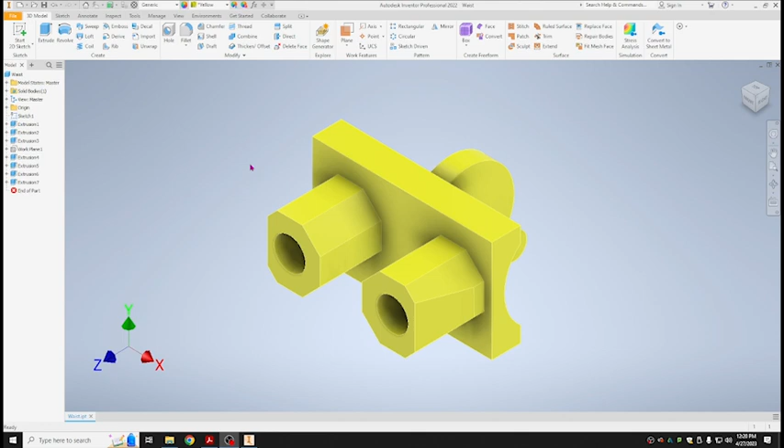All right, welcome. Today we're going to showcase how to create the waist for the Lego minifigure. Let's get right to it.

We're going to start a new file, new, standard IPT, and hit create. Now if your document settings are not set to millimeters, we can change them. Let's go to the top of the screen, hit tools, document settings, units, and change it to millimeters. Apply and close. Now we're ready to go.

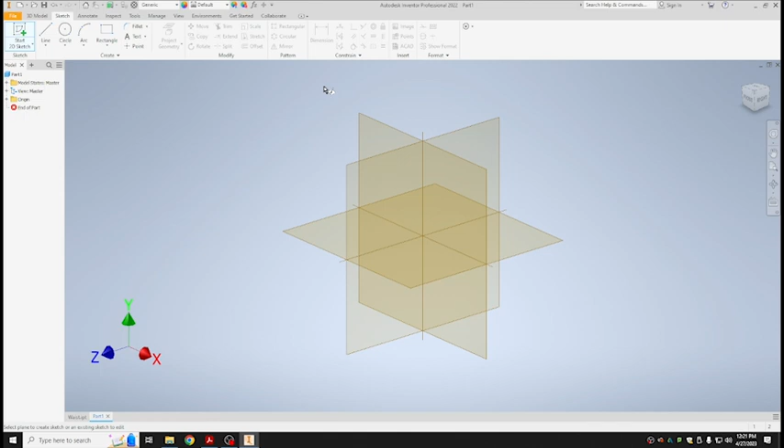Click on the Sketch tab and we'll start a new 2D sketch. Click on the XY plane. Okay, and we're going to start out by using a 2-point center rectangle. We're going to use this because it's going to help us a lot later on when we draw the features on the top and the bottom. So let's start right at the origin.

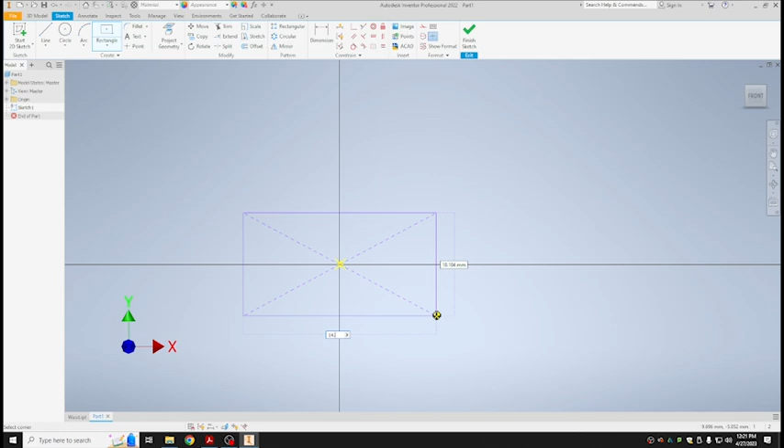Click one time, move the mouse out, and the dimensions we want here are 14.2 by 7.87. Okay, so 14.2 by 7.87. All right, that's all we have so far.

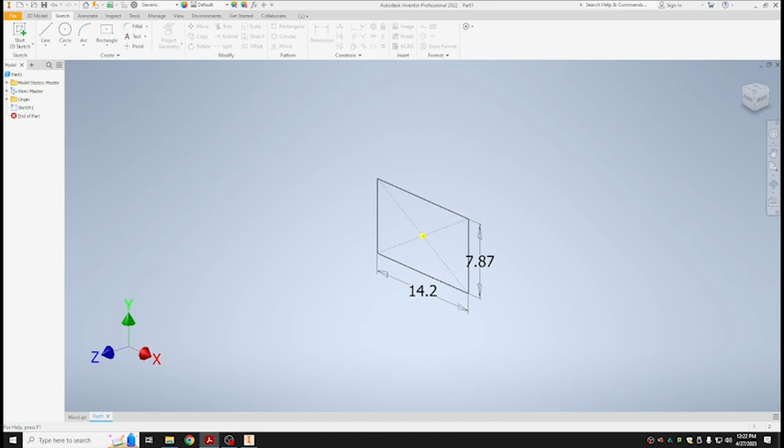We're going to finish that sketch and extrude it out. And how far are we going to extrude it? It's going to extrude out at 2.29. Okay, so it's 3D model, extrude, 2.29. Okay. All right, good so far.

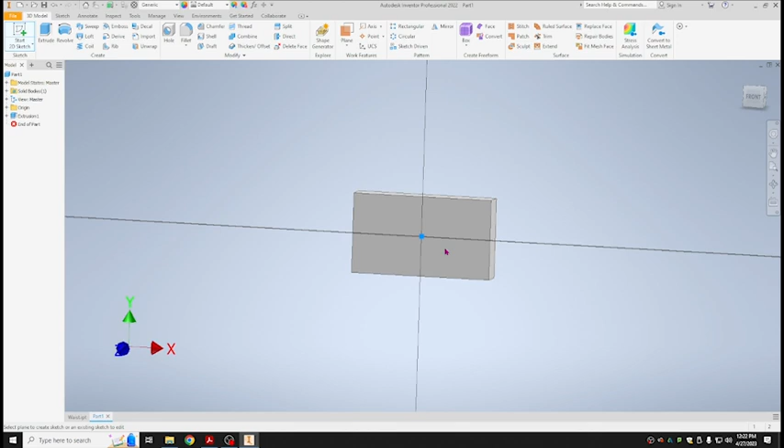Now we're going to draw the top features first, the ones that basically go into the torso or that connect this part to the torso. So click on this surface right here. We'll start a new sketch on this surface.

And I'm going to do a couple things. First, I'm going to measure. Okay, so I'm going to get my line tool out. And I like using this. There's a couple ways to do it, but I like to do it this way because then the dimension will stay on there and give me a good point to reference. So I'm going to start right here in the middle of this line where it snaps green. Click it and go to the left 3.04. Okay, good so far.

Grab your circle command. All right, and we're going to be drawing a circle. We need to know what the diameter is. So go to the end of this line that we just created, and we want a 2.5 millimeter circle. Okay.

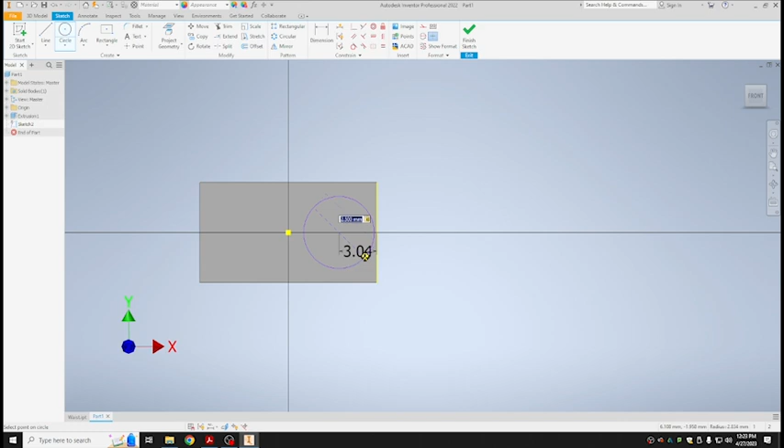Now we're going to do a couple other measuring things, but I want to zoom in a little bit so that way you can see it. So I'm going to go ahead and take this line, and I'm going to move it over from this origin, or from the center of the circle, over to the right. And how far? I just want to double check that I have it. It's 2.41. Okay, 2.41. And now grab the line tool again, and then from the end of that 2.41 line right here, where it snaps green, click it and move down 1 millimeter and make sure it's at a 90-degree angle. Okay.

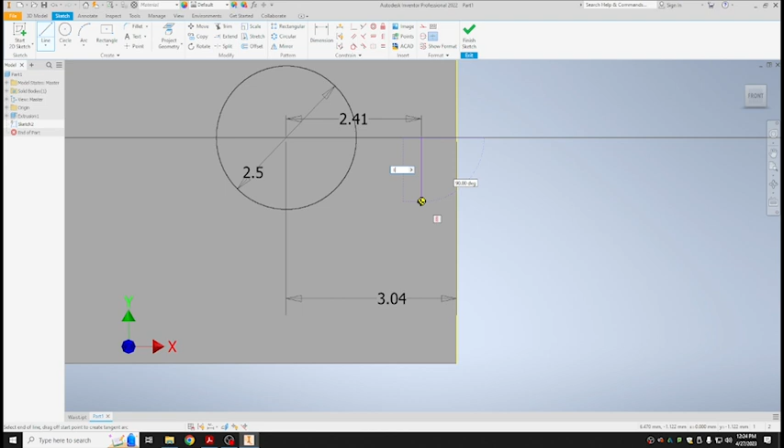All right. And the reason we did that is because this point right here that I'm pointing at currently, that's the one that's going to reference our octagon.

All right. So now we're going to get the octagon tool. We're going to use the polygon tool. It's located in the drop down of the rectangle. All the way at the bottom, we see polygon. Click on it, and it probably will default to 6. We want that to be 8, and we want the first setting selected, not the second one. So we want this first circumscribed selected.

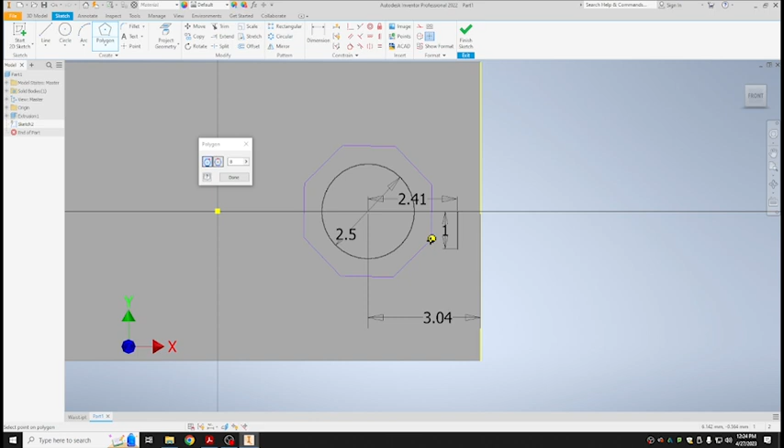All right, and then I'm going to go to the center of this circle, this point right here. I'm going to click one time and move the mouse out. And now I don't have to measure, I don't have to put anything because I have this reference point right here at the end of the one line. That's why I drew that right there. Once I match that up, I click. Okay, there's going to be a bunch of these constraints. Just hit done, and you are good to go.

All right, so we're going to finish that sketch, and now we're going to extrude. Okay, and what are we going to extrude? Just the outer octagon. Do not get that inner circle. Okay, we need to know how far to extrude this at. It's going to be extruded at 2.29.

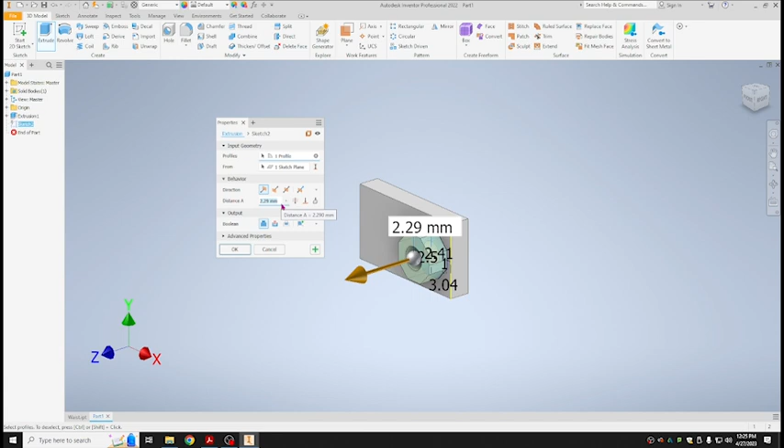All right, looking good so far. So we need to draw in an angle. This is sliced off on the side here. If we look back at this one, just to give it a reference, this is at an angle here. Okay, so we're going to put that angle in.

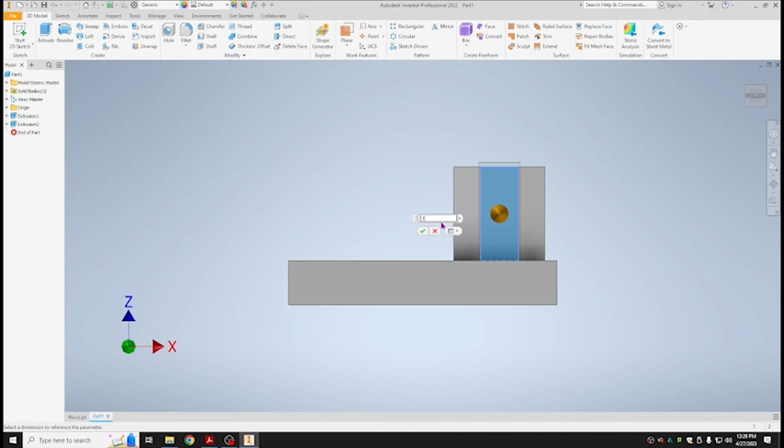So to do that, we're going to get right to the top of the screen, hit offset from plane. And what plane do we want to reference? This one right here. Okay, so just click on that surface. We don't need to offset it at all, but I do find it helpful. It eliminates some issues. So we're going to offset it by just 1 millimeter, okay? And now it'll appear in front of the object, yep, just slightly, which is what I want. Okay, and then from here, we're going to start a new 2D sketch on this plane.

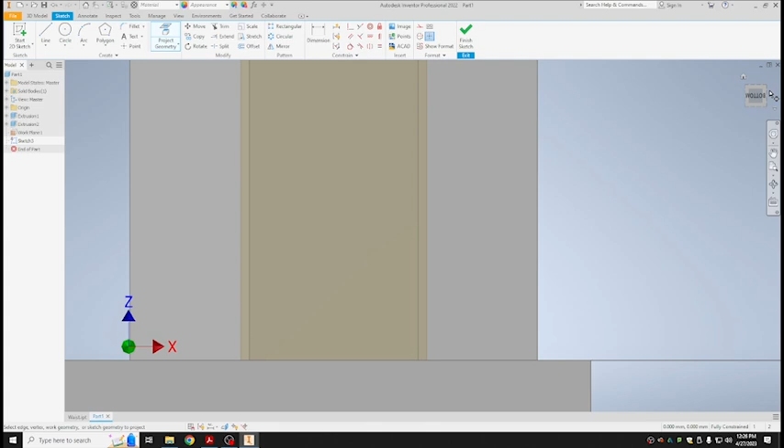I'm going to use project geometry, and I want this line right here. Make sure this gets tricky, but make sure you have this front line, as opposed to this line or this line. Make sure it's this front one. And we'll also do this top one. What that does is it projects it onto the plane we're working with.

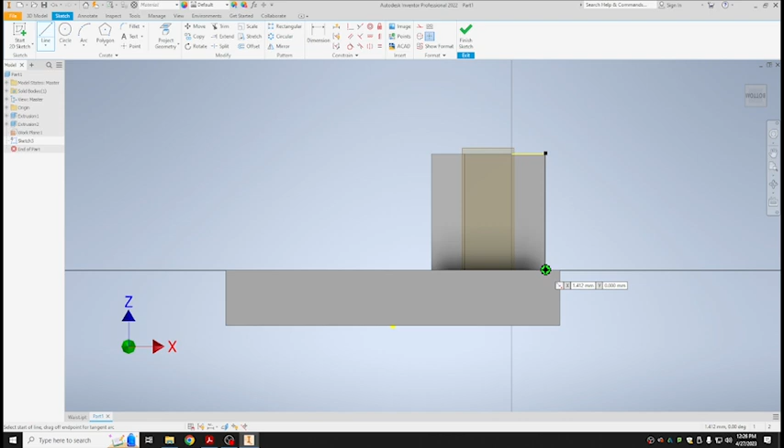From there, grab your line tool. We're going to start right here where it snaps green, make sure it's the bottom of that line, snapping green. Click it, and we're going to go up and to the left a certain degree measurement, which is 8.29. So that means from this yellow line, it's 8.29.

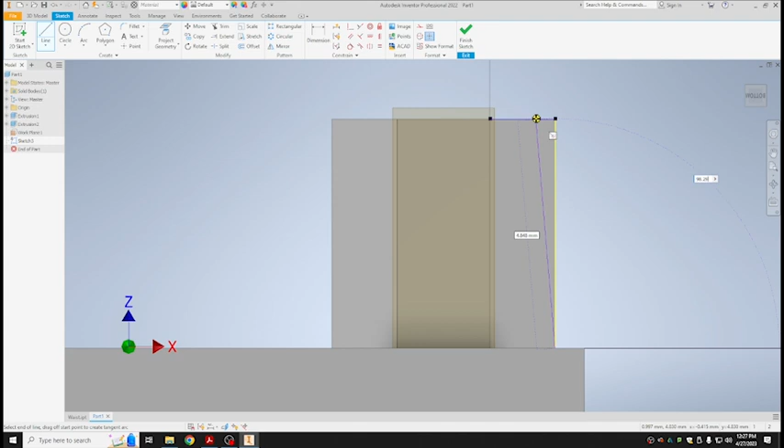Now, what I see is Inventor is measuring from the x-axis, so I simply have to add 90 degrees plus 8.29. That would equal 98.29. I'm going to type it in manually. I hit Tab, do not hit Enter, hit Tab, and then you want to match it up so it lands right there on the end of the line. Click it.

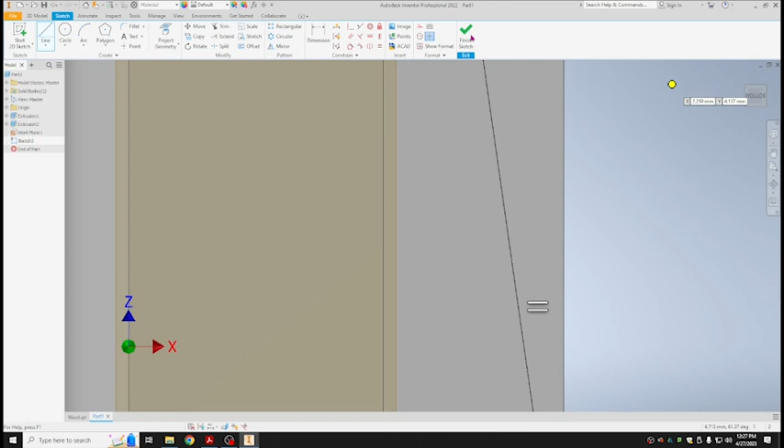I'll finish this shape out. It's just going to be a triangular shape. Even though that reference is there, let's make sure we have it. Click it there. Now we're going to finish the sketch, and we're going to extrude cut through the entire thing. So cut, and we want to go through - that's this button right here, through all. Let's see, it looks pretty good. Hit OK, and voila, looks good.

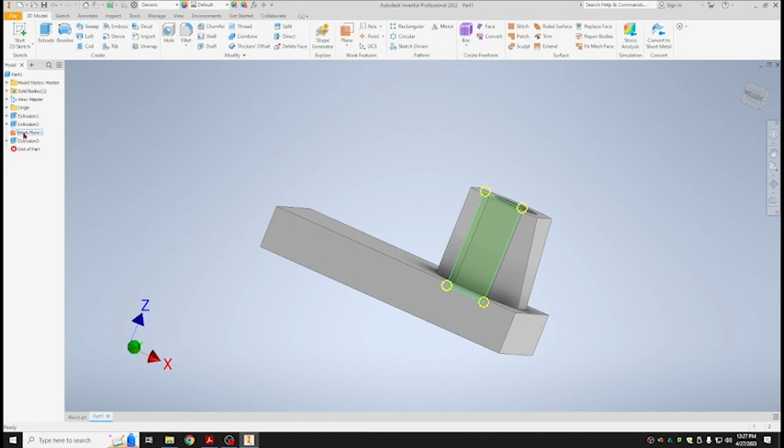So now what we're going to do, let's get rid of this work plane. You can right click on the work plane in the model menu and then hit visibility to make it go away.

And what I want to do here is I want to mirror. I'm going to just copy this and bring it over to the other side. So now you're going to kind of see why we started out with a 2-point center rectangle, because we're going to mirror it across the YZ plane, which is right in the middle of this object. So it works out really nice for us.

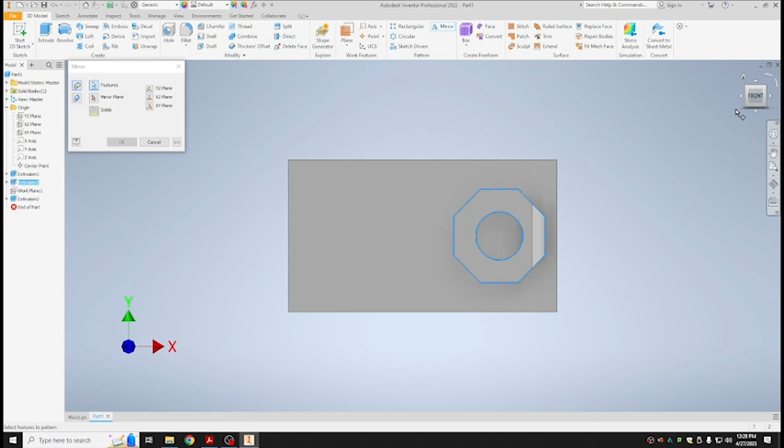If you're in the 3D Model tab at the top, there is a feature called Mirror. Click on Mirror. First of all, it wants to know what features - well that's this whole object right here. So I'm going to select this object, and it is in blue now, so we know that it has the object we're looking for. Now, it doesn't have the cut, so if I click on Extrusion 3 also, by holding Control, I can include that.

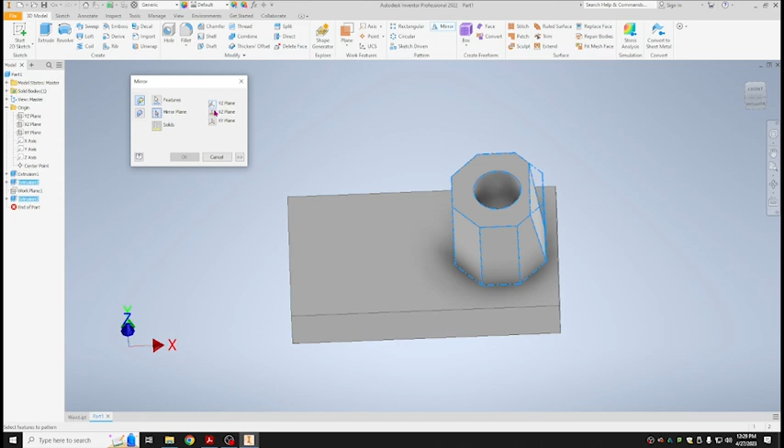Okay, so if you hold Control, you can select both of them. Alternatively, I could have done it like this - I could just do Mirror, hold Control, and then I select Extrusion 2 and Extrusion 3. So that's the features that it's going to copy. Now it wants to know where to mirror it. So I click here, Mirror Plane, and now I've got these options, YZ, XZ, XY. You can click on any of these and it will do so without any problems.

So that's flipping around the wrong way. We want the first one, the YZ plane. It gives you a preview. Hit OK, and there we go. Look at that, saved us some time and some work.

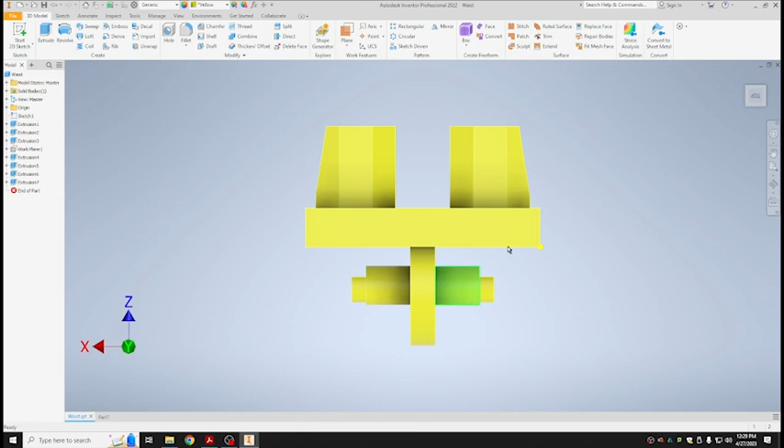All right, so from here we're going to draw the bottom, which looks basically like this. Take a look at the side view. Okay, so let's get to it.

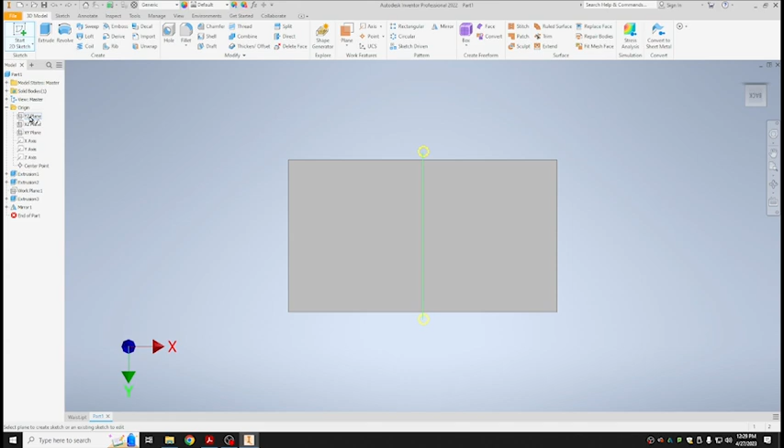So we're going to start a 2D sketch on the bottom. Actually, excuse me, we're not going to start a 2D sketch on the bottom, my mistake. We're going to start a 2D sketch on this plane, the YZ plane. And I'm just going to reorient it so it's facing this way. All right, so we need a couple things here.

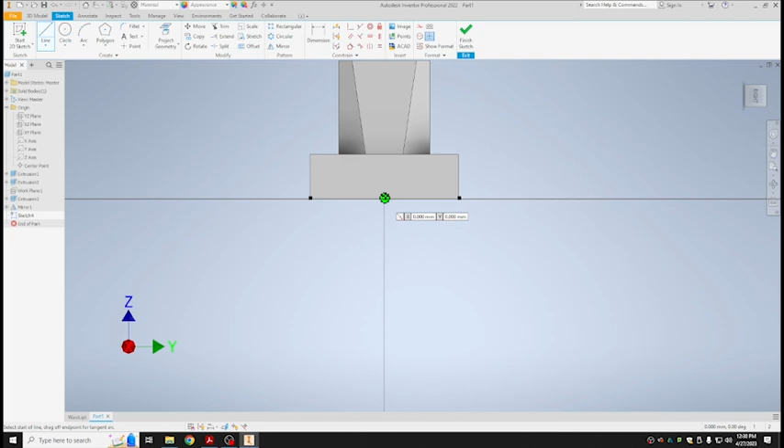I'm going to need some measurements in order to accurately write where this is. So first of all, let's get the line tool, and we'll go right to the middle, right there, the origin, and we're going to go down from there 5.83.

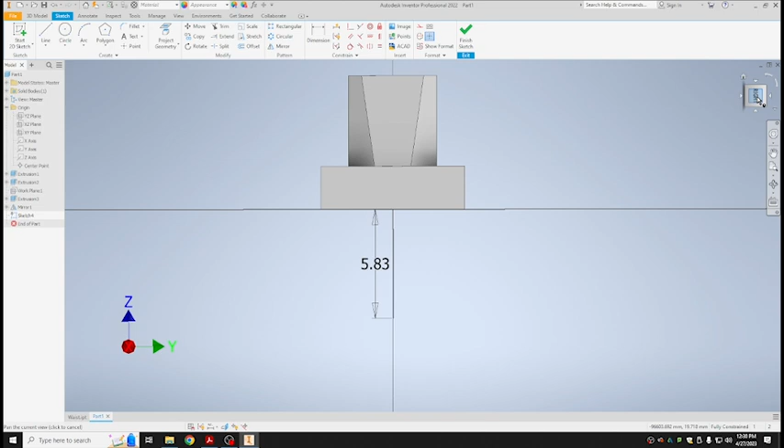Now, what I need to do is I'm actually going to keep it at this orientation, that's fine. What I'm going to do now is I'm going to draw another line from the bottom of that line. I know this seems a little bit redundant, but it's important. We're just going to draw it up at 7.12. Okay, so let me just separate those out so you can see them better.

Right, so that line ends there, that's this terminus, that's where it begins. And then we have this line from the bottom to right here. Okay, and we're going to need a circle. So I don't want to accidentally hit this line, so I'm just going to delete it. I'm going to get rid of this line, hit delete, delete, and now I only have this one long line, 7.12.

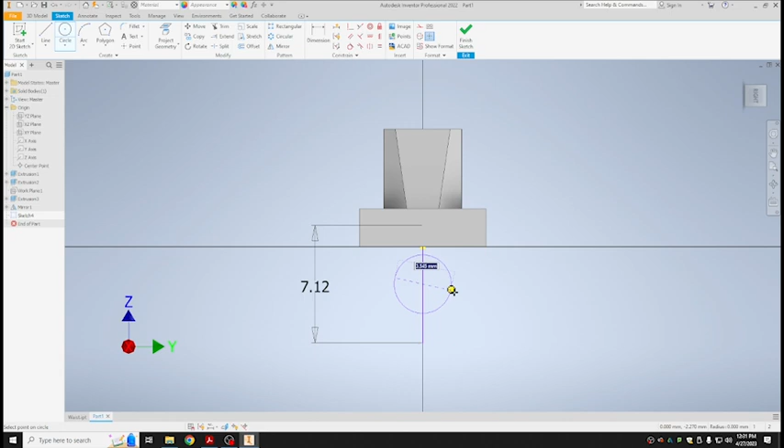I want the midpoint. Grab your circle command, go over to that line, and find the midpoint. There it is, snap it, click, and expand out. How far are we going? Well, that's the question, isn't it? The diameter of this object is going to be, you probably guessed, 7.12.

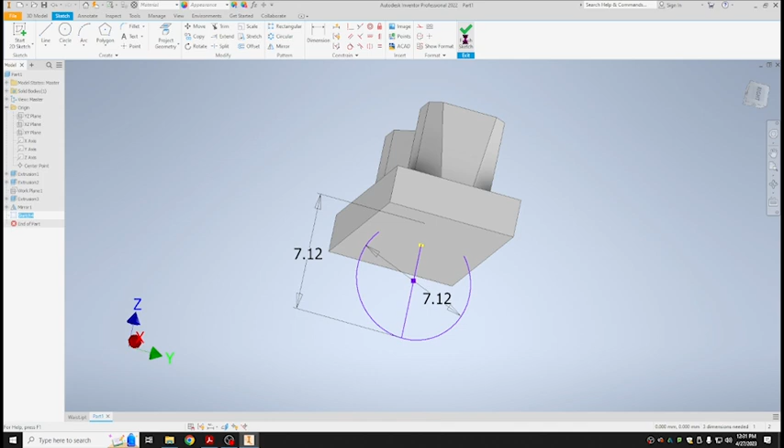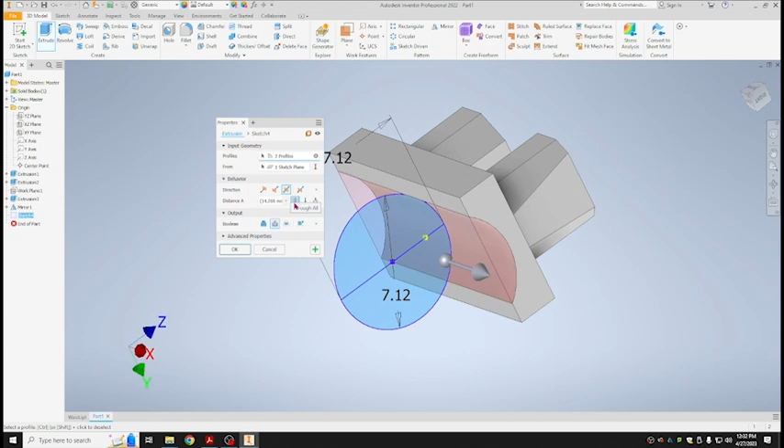Okay, now let's save us some time later on. We're going to do something in the model menu. Right click it and hit copy. I'm going to finish this sketch, and now I want to extrude using the double arrow, and I want to cut through all. That's going to be this circle. I'll select it, and it cuts all the way through, just like we want. Again, double arrow, through all, cut. Hit OK. Looks good.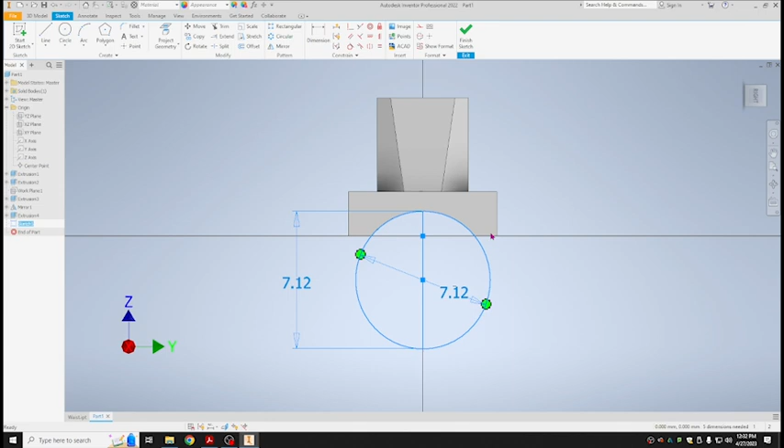Next step, start a 2D sketch, and we're going to go with the YZ plane again. Click on that. Now in this sketch 5, go to your model menu, right click on it and hit paste. There's our circle right back where we want it. Let's finish that sketch, hit 3D model, extrude.

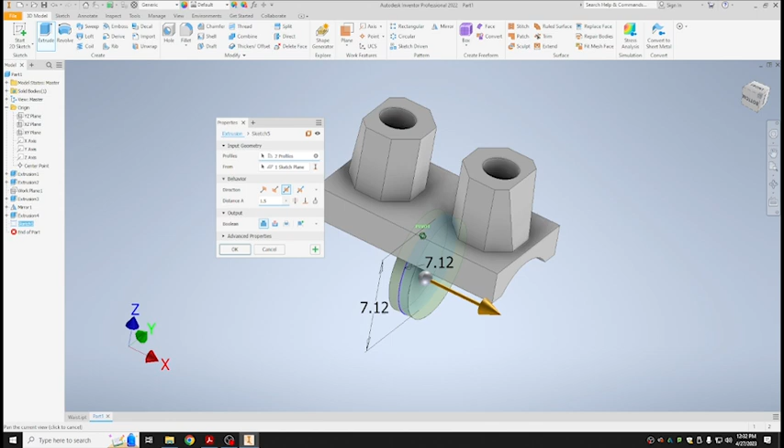We're going to use the double arrows again. The distance is going to be 1.5, and we're referencing this circle. Now before we hit OK, I just want to check the angle. Look at that, it's extruding out both sides at 1.5. Hit OK. Looks good so far.

Start another 2D sketch. We've got to add some more features. We're going to use the YZ plane again. Click on that. Now we're going to use the circle tool. Go to the outside of this circle, and it will show you the center. There it is, click on it one time. The diameter for this particular circle is going to be 2.29.

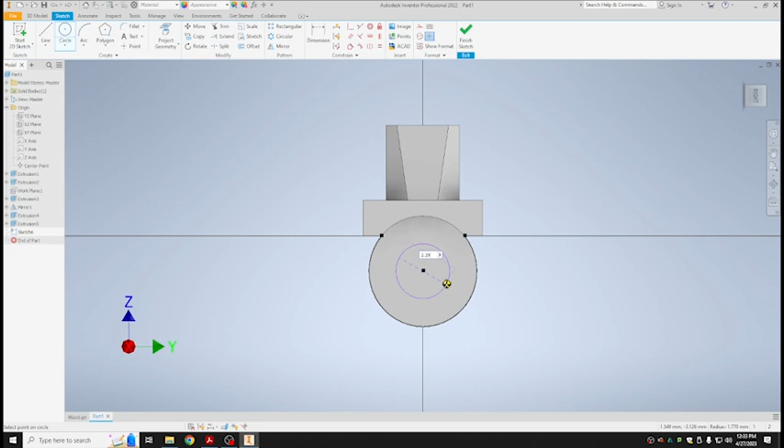And you're not going to be able to see it, because it's actually internal. It's inside, right where that yellow line is. Just for your information, in case you're concerned about where it went.

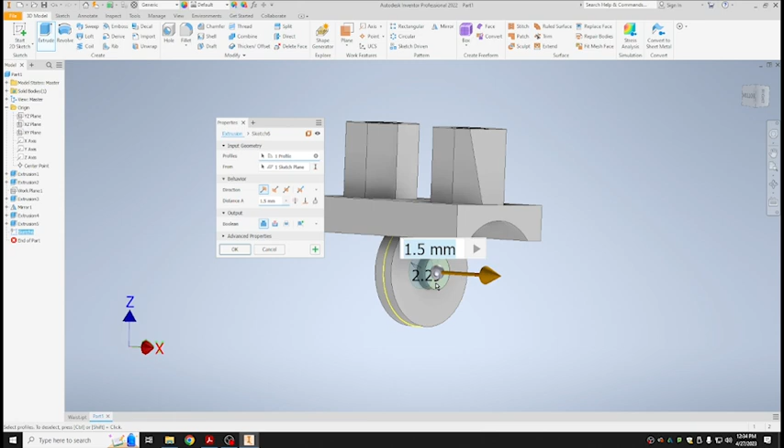All right, we need to extrude that out. I'm going to finish the sketch, then extrude. Thankfully it found the circle, we didn't have to select it. Hit the double arrow again, and this time we're going to do 6.86. Hit OK. All right, looking good so far.

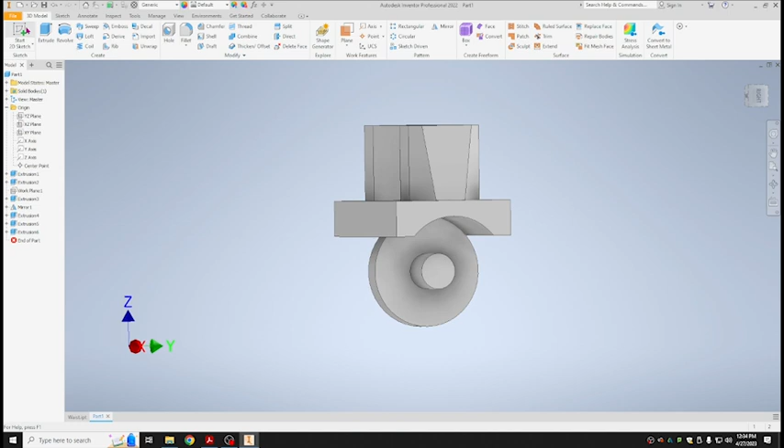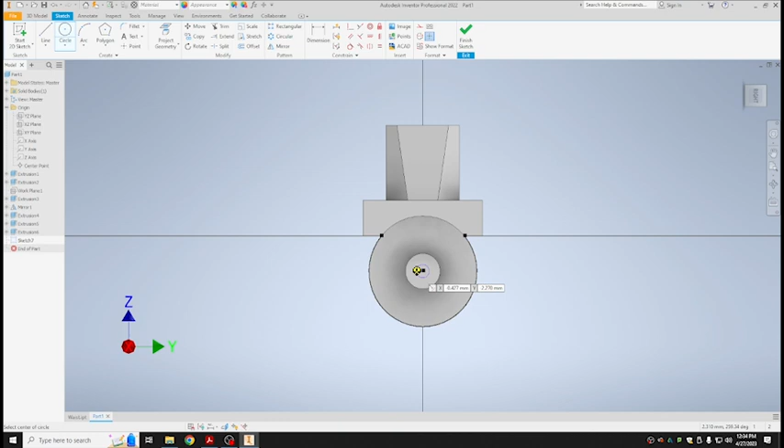Now we are going to start another sketch, again on the same YZ plane. I'm going to go with the circle command again, and try to locate that midpoint. There it is. Remember, if you just come to the outside of a circle, it'll show you the midpoint. Click it one time. This is going to be a diameter of 2.02. It should be slightly smaller than that circle, which it is.

You can see it right there, but again, it's internal. Now this particular circle, this part of the Lego is not a circle completely. It's actually cut off a little bit, so we need to indicate that. So how I'm going to do that is draw a line and measure.

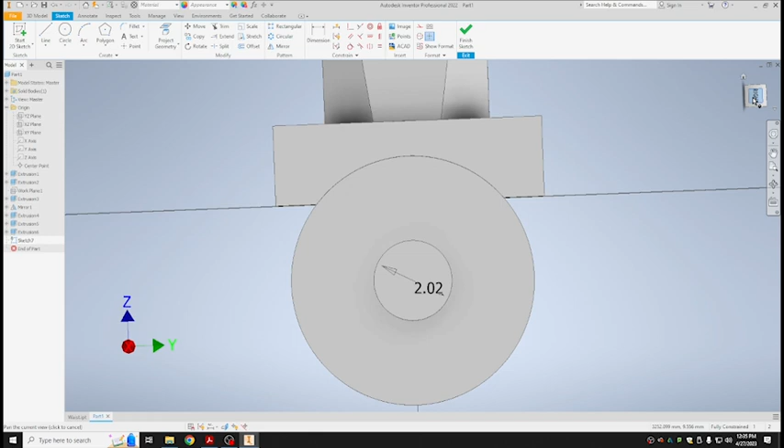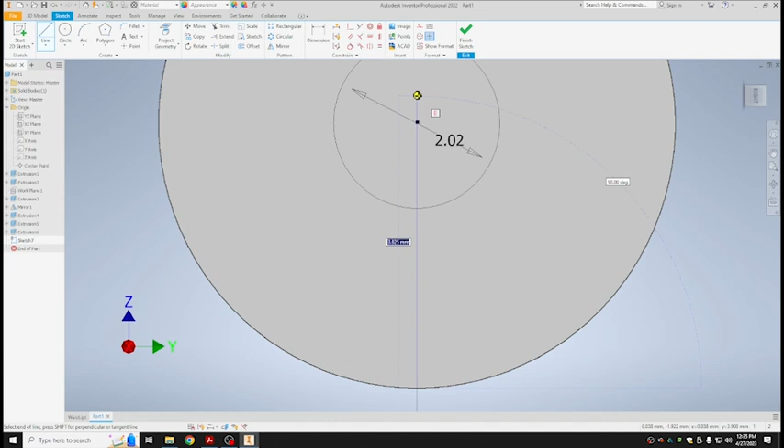Get your line tool, go right to the bottom of the circle. Hopefully we can get it to snap. You'll know that it's correct because the x coordinate should be 0. You can see it's dotted all the way up, that purple dotted line. So what I'm going to do here is get that point, click on it on the outside of the circle, go straight up. How far? 4.05.

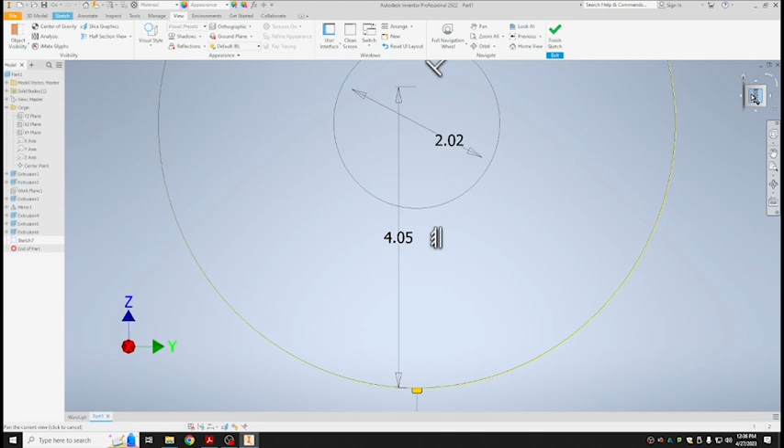Now, just simply make sure you're at a perpendicular angle. Go off to this side of the circle, click it, then come back up to the top of that line again, and click it. I'm actually going to wireframe this for a second so you can see what it looks like. There we go. So you can kind of see in there right now where we have that object.

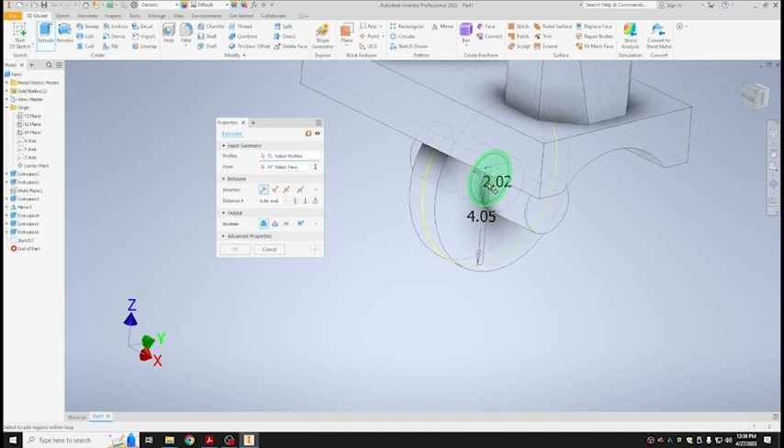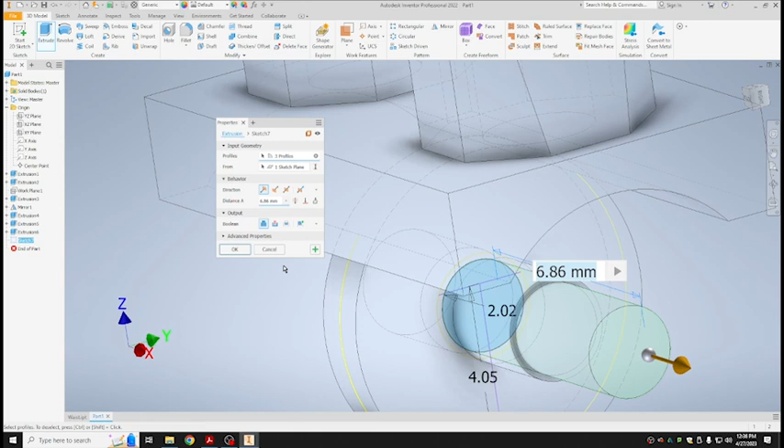We're going to finish that sketch and extrude that out. Now make sure you're selecting just this and this, because it's going to produce this shape. That is the shape you're looking for. Do not include the top. I'm actually going to select it just to show you what not to select, then I'll cancel it out and redo it. Don't select this top part, because then it just looks like a circle. So when you're selecting this part, just be very careful. Extrude, and make sure you click on this part and this part.

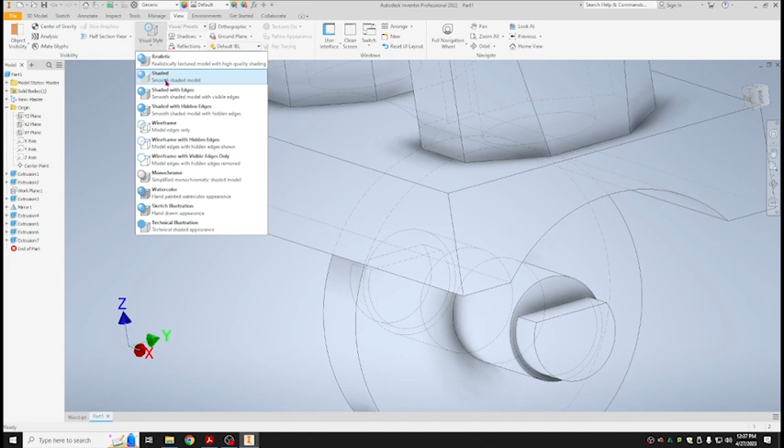That's it. Now in this menu, double arrow again, and how far are we going to extrude this one out? It's going to be 6.86, hit enter. And there we go. Let's turn it back, go to view. I'm going to change the viewing back to shaded.

Looking pretty good, I think we're all set. That's the last step. Now from here, all you have to do really is, well, you could put a color on it, but that's pretty much done. So we're going to save it.

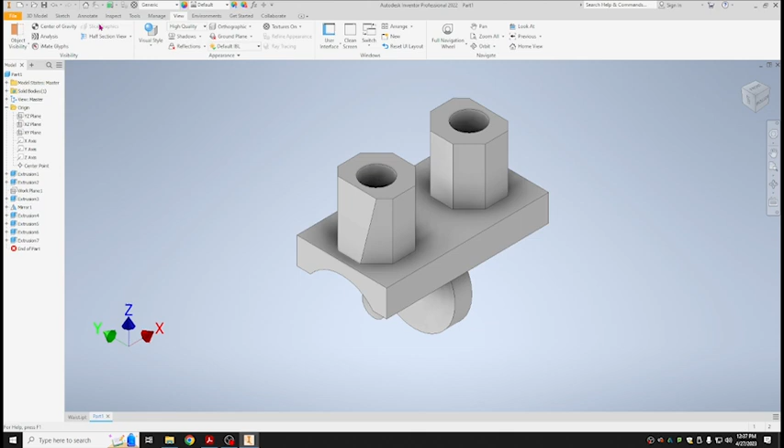I'm going to add a color before I do. Let's do something different this time. Maybe, how about some bronze? Let's go with that. Doesn't look like bronze, but that's okay.